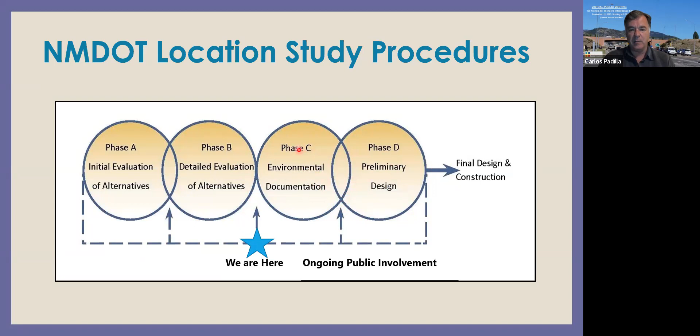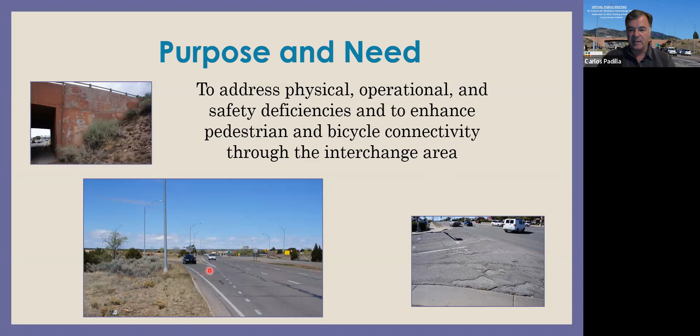So the purpose and need for this study can be summarized as the following: to address physical, operational, and safety deficiencies, and to enhance pedestrian and bicycle connectivity throughout the project interchange area. And we have some photos showing condition of the existing structure, some of the deficient entry points onto St. Francis that we'll talk about, just general conditions that we've identified.

So an overview of the study. So a vicinity map on the right. So to orient everybody, north is up. So this is St. Francis that runs in the north-south direction. And then crossing underneath is St. Michael's Drive, and eventually connecting down to Cerrillos Road. So the study area is depicted here along St. Francis, goes from Siringo Road on the south, north to San Mateo Road on the north. And along St. Michael's Drive, it goes from Galisteo Street through the ramp intersections to Pacheco Street.

As Paul mentioned, this facility is regionally and locally important. St. Francis Drive provides access from I-25 to the south of the study area to communities located further north of Santa Fe in the north central part of the state. And both St. Francis Drive and St. Michael's Drive are important arterial roadways within Santa Fe's local transportation network.

Some of the key issues that we've identified as part of the study process. Operations and safety. One of the primary things that we've identified is the lack of merge lanes at the on-ramps to St. Francis Drive. So again, looking north along St. Francis, we have the northbound ramp that comes from westbound St. Michael's and comes into St. Francis Drive, and it abruptly ends. There's no merge lane to let people safely find their way into traffic in that direction.

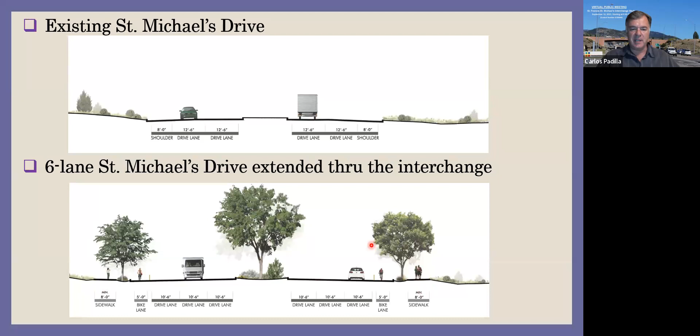The difference here, again, would be there would be 1 additional lane, and under this, we would be adding buffer areas, bicycle lanes through the study area, additional buffer lanes, and sidewalks along St. Michael's. As I mentioned, in response to the City of Santa Fe request to consider 4 lanes, we did look at a 4-lane option through the interchange, just the opposite. So under this, we would be taking the 4 lanes that exist at East Galisteo and extending them through the interchange area toward Pacheco. So we would only maintain 4 lanes through the interchange area, but in a similar fashion, we would have buffer areas, on-street bike lanes, additional buffer areas, and sidewalks to the outside.

We looked at some smaller options. We looked at some possible intersection configurations, one at Siringo Road, where we would take what's now a single left-hand turn lane as you're going north and turning west onto Siringo towards Santa Fe High. We looked at an option that would add another turn lane to that. We looked at some optional improvements at the off-ramp coming from St. Francis to St. Michael's. And we looked at some options at West San Mateo Road, the possibility of adding a left turn lane there as you're heading east, trying to go north on St. Francis. I'm going to let Claudia talk a little bit about some additional improvement opportunities that are under consideration as part of the study.

Thank you, Carlos. Can you hear me okay? Yes. Okay. Excellent.

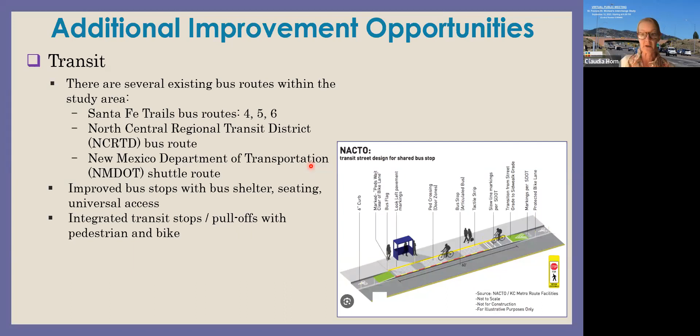So from a landscape standpoint and green infrastructure, with the new configurations, we'd like to look at it from a standpoint of stormwater management and green infrastructure. So looking at opportunities for taking some of the surface flows that fall onto the impervious surfaces, directing them towards swales by using curb cuts and planting native vegetation in those areas to help absorb some of the stormwater and create a nicer streetscape environment.

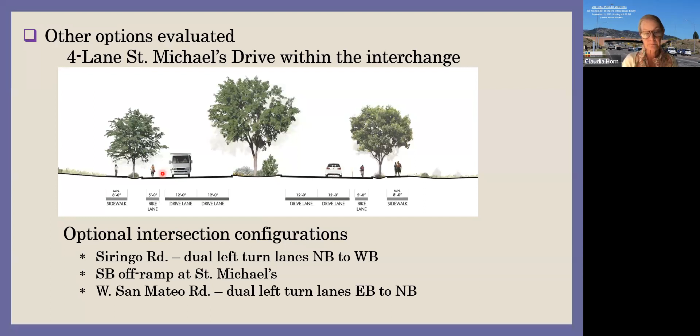Depending on the alternative, there's a number of different movements that need to cross the bike lane. So how that works out in plan is something that still needs to be finalized. But I think we're trying to have that separated facility here.

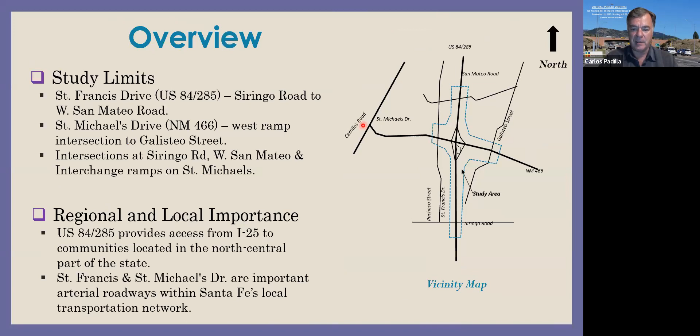Okay, and then we have another question from Bree Simons. And her question is, what would be the impact to the northeast side ponding area? Okay, it would vary depending on the alternative. I think I would probably best describe it by this. Let me go back to what's there now. So this is the existing interchange. So that ponding area that we're pointing out is right in this area.

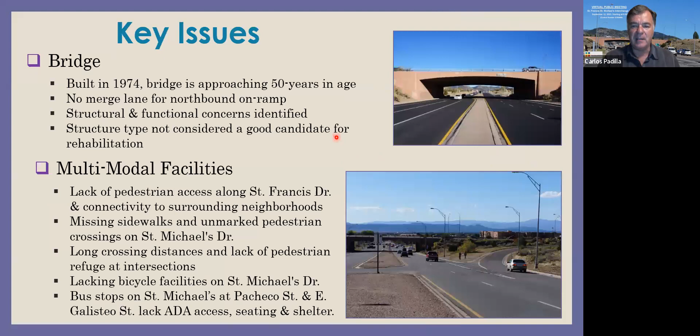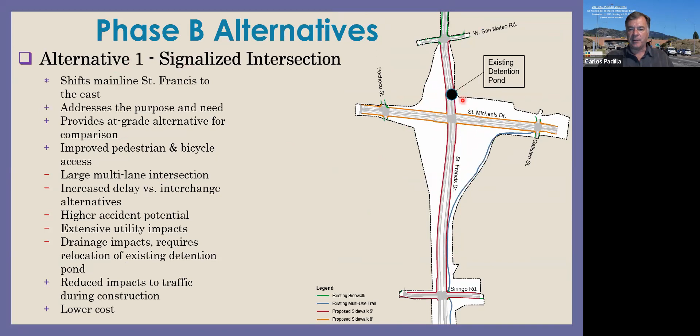All the other alternatives would have minor impact to no impact because by the time you get to where that pond is, they're pulling back in toward St. Francis Drive. So this one, for instance, on the preferred alternative, the ramp reconfiguration, we're eliminating that ramp. These are just pedestrian, so there would be no impact to the pond under this alternative. So it depends on the alternative, but the one that had the significant impact to it would be the at-grade intersection.

Okay, thank you. And Theodore Pomeroy had a question, and we may have already answered this, but the question was St. Michael's Drive, 4 lanes. Is that 4 in each direction or 2 each way? Sorry, let me clear. It's 2 in each direction for a total of 4 lanes. Great, okay. Plus the on-street bicycle lanes.

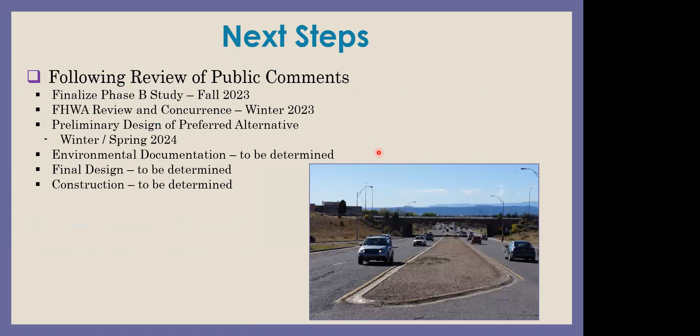Okay, and then another question from Mike Galizio. Under alternative 3, are signals being added to the US 285 off-ramps intersections on St. Michael's Drive? Okay, so he's asking about the recommended alternative, right? Alternative 3. So yes, just to run you through what's there. Pacheco Street would remain unchanged. There's an existing signal there. The existing signal at the south ramps would be reconfigured a little bit, but it would remain as a signalized intersection.

Then under the existing condition, right now, there's not a signal here, but by eliminating the westbound and northbound ramp and consolidating it, there will be a left-hand turn movement to get on in this direction or right in this. So this would be a new signalized intersection. And then, of course, Galisteo would remain a signalized intersection as it is now.

Okay, and then we have another question. Who will the funding of $39 to $45 million come from? I'm gonna let Javier, you want to take a shot at answering that? You repeat the question, Carlos? Go ahead, Joey. Who will the funding of the $39 to $45 million come from?

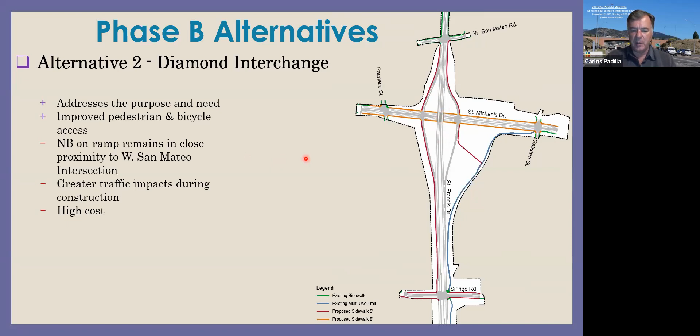Okay, and then another question from Theodore Pomeroy. Would the new bridge be wider? Depends on the alternative. Under alternative 1, there would be no new bridge because it would be a signalized intersection. Under alternative 2, marginally wider, that's the Diamond Interchange. Let me go up here. It's always helpful to look at display. So marginally wider, but not substantially, maybe just a little bit to accommodate some improvements along St. Francis. The one that would be wider would be the recommended alternative.

The reason for that is because it'll still carry 3 lanes of traffic in the northbound direction, but in order to accommodate that merge lane, that merge lane is going to be brought on south of the bridge, and it's going to extend over the bridge and over St. Michael's. So the bridge would be an extra lane wide on the east side. Now, under the final alternative, instead of 1 bridge, it'd be 2 smaller bridges that would accommodate 3 lanes in each direction. So depending on the alternative.

Okay, thank you, Carlos. That's all the written questions that we have right now. And we don't have anyone, well, let's see. Dan Painter has a question. What is your question? Yeah, you hear me okay? Yes. Good.

My name's Dan Painter. I'm on the city's bicycle pedestrian advisory committee. We're very concerned about how this interchange is redesigned with regards to how it's going to accommodate pedestrians and bicycles. When I look at the recommended alternative, northbound pedestrians and bicycles on the east side are kind of forced to go in a substantially out of the way direction in order to get north, say they just wanted to travel up St. Francis. Have you looked at the potential of any type of pedestrian and or bicycle overpasses, bridges of any kind, either just at the crossings as you show them, or maybe even attached to the main line itself, just to make it more direct travel for those folks?

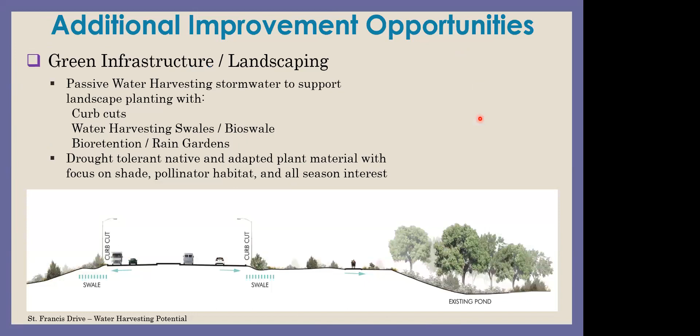And we have a question from Tristan Carnes. Would option 4 not have the same weaving issue for the traffic attempting to turn right/east on San Mateo? I assume that traffic in that direction would be less than the traffic that wants to turn left or west on San Mateo.

Yeah, that's a great question. She's thinking very, very clearly here. So the difference here is it still would have the weave condition, but instead of the weave happening outside on the right, again, let's go in the direction toward West San Mateo. You would come through this intersection, you would be at grade through a signal, and now you're climbing uphill to meet the grade here. So when you get to this point, you still have to merge into traffic. You still have to merge into this northbound traffic.

The difference is instead of merging in from the right side, that's why we call it left-on access, you would merge in from the left side. So now instead of like on the diamond, the problem being you're weaving from right to left to make a left turn, if you were coming through wanting to come here and turn right on San Mateo, you would have a similar issue. You would have a very short distance to cross through to make a right-hand turn. And similarly, because it's so close to the intersection, this new merge lane would have to go through this intersection.

So alternatives to the diamond and this alternative, one of the main drawbacks is to get that additional merge lane through the intersection, it adds a full lane to St. Francis Drive through what's pretty much a smaller intersection. So it widens that intersection. The intersection's developed here. There's driveway access that's very, very close. So it's problematic in terms of both how it functions and what impact it might have to the surrounding properties.

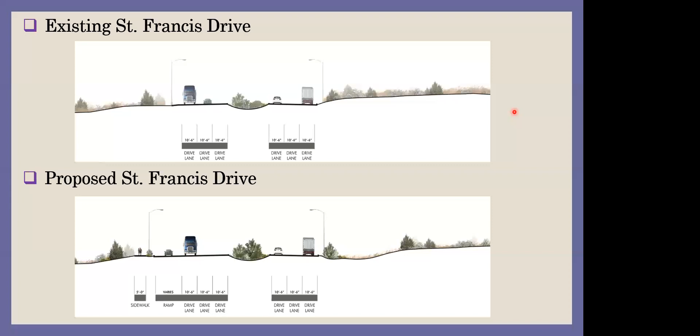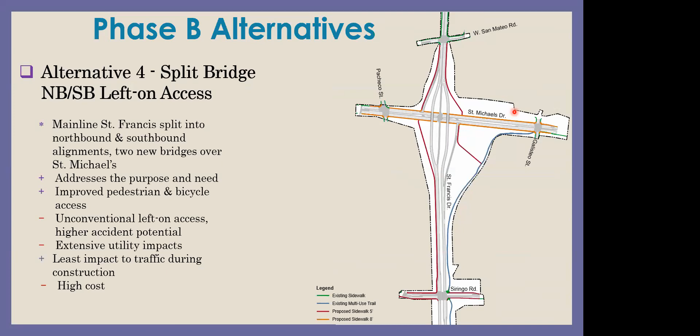I think it would be very worthwhile because with that left-hand turn from the diagram you were showing, you'd have merges. You'd have a merge for people who are going straight through who want to get over to the left, and then you've got people who are coming up off of that ramp who are going to be trying to get over to the right, and you've got, I think, a dangerous weave section there with people competing. It's probably about as bad as it is now, but I think by eliminating that left turn, it may be making the whole situation better.

Yeah, and actually we did look at that as part of this. That would take care of a weave condition where we're still very close to that intersection. It would, and I agree with you. There are alternate things you can come up with, Pacheco, but it would substantially change travel patterns in here. I mean, all of you know that there's a lot of people who come and actually turn southbound and go along San Mateo into the neighborhoods, a back way into the hospital. So that is certainly possible. It would change traffic patterns in the area, I think in a substantial way.

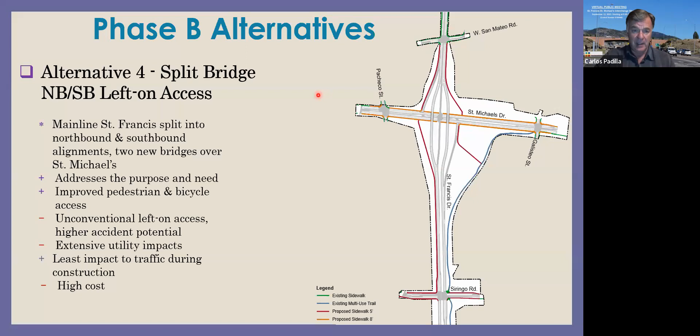We did look at it, but again, I'll come back to what we're recommending. That's one of the big benefits of this alternative: because we're able to bring them in further to the south, we now have adequate room to safely merge them in before we ever get to West San Mateo, and those concerns are eliminated at both of these spots. So one of the major advantages of this ramp reconfiguration alternative. Okay.

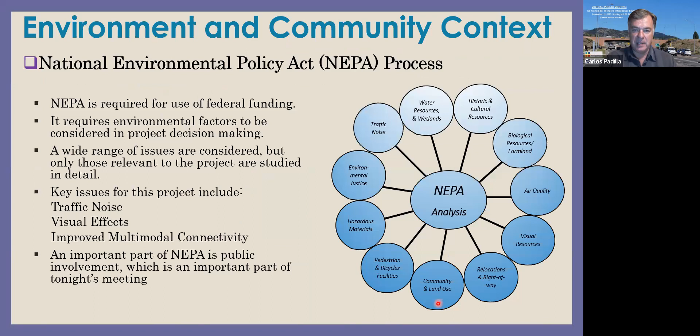So the interchange there at St. Francis and St. Mike's, there was a comment about taking the 6 lanes down to 4. Would that be part of this project as well? Yes, so let me just give a little bit of background of what the study considered. And the best way to show it is to show you what's there now. So the short answer to your question is yes, but to give some context of what we looked at.

So St. Francis Drive, 3 lanes in each direction, that has not been looked at being altered. The main difference is adding those merge lanes that we've been discussing. Now, if you think about what's there right now, it's really a lot different.

So St. Michael's to the west is 6 lanes. And then what happens is it drops a lane coming through. So in this area under the bridge, it's 5 lanes. It's 2 lanes in the westbound direction and 3 this direction. And the third one actually drops to that outside loop ramp. And then once you get past here, it turns into an existing 4-lane condition. That's what we were showing in those illustrative sections, and ties into Galisteo.

So the study looked at doing 2 basic things. One is taking 6 lanes as it exists now, extending it through the interchange to Galisteo, where we would go back to 4 lanes. And then the city asked us again to look at that 4-lane option, which is the opposite. It would be taking 4 lanes from Galisteo through the interchange and ending it here. Now it's still going to be existing 6 lanes in the existing condition, but this is the effort that I was talking about. The regional plans with the city and the MPO are going to be investigating whether 4-lane sections could actually be extended further west. So that's kind of the framework of how we looked at it.

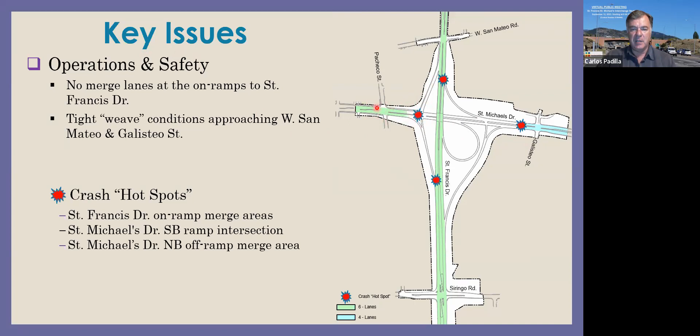Not at this time. So what we would be doing is we would be marrying into what's there now, going from 4 to 6. And Pacheco Street intersection would not be part of the project. It would remain functioning as it is. And then the city, I don't know if it's even programmed, but at some point in time, I think they intend on taking up the study of what to do to the west. And they will be looking at a possibility of going to 4 lanes, but this project would just tie to that. The improvements on this project would pretty much stop just west of this ramp intersection. It would not include Pacheco Street. Okay, thank you.

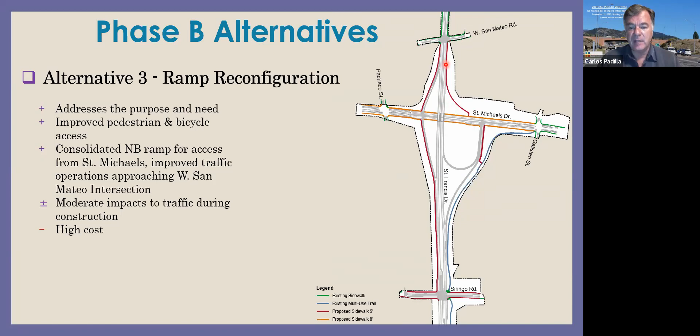And we have another question from Mike. Under alternative 3, consider converting the northbound on-ramp to US 285 to a shared use path to accommodate pedestrian bike travel from westbound St. Michael's Drive to northbound US 285. Yeah, that's a good comment. What we're showing here, this could be normal sidewalk. This could be multi-use path. There is space there, that's what we meant by potential for enhanced improvements here, because we do have this space available. So that is certainly something that we could look at. Basically what we're going to want to find out is what enhances connectivity and what serves all the directional needs. So that's a good comment and something that we will definitely be looking at.

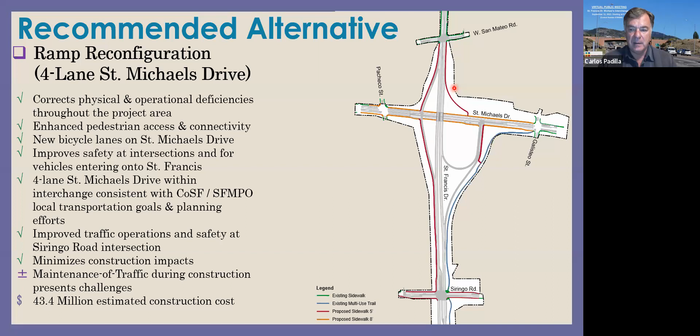Okay, on behalf of our team, I'd like to thank you all for attending. You had some very good questions. We encourage your input. Again, there's a multitude of ways to provide comments. All your questions tonight will be part of the meeting record and the public comment record. And please get your comments to us by October 13th.